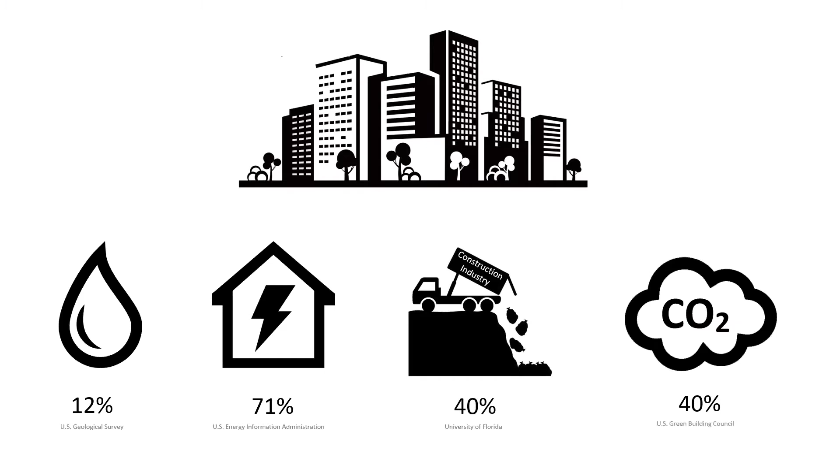Buildings have a tremendous impact in the United States. About 12% of our water and 71% of our electricity are consumed directly in buildings. If you take a look at our landfills, about 40% of what's in the landfill comes from the construction industry, and about 40% of the entire country's CO2 is attributable to buildings.

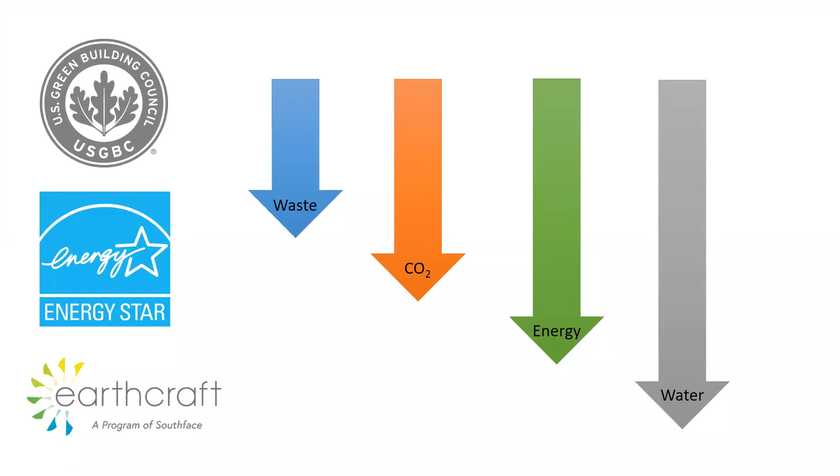We owe a huge debt of gratitude to the various green building standards that exist today. They have moved the market, building code, and conversation towards better buildings for the environment and occupants. But in a world facing environmental challenges and all of the equity impacts that come with them, is it enough to do better? For the Living Building Challenge, the answer is no. In a resource-constrained world, incremental change is not a viable option.

Buildings have to be regenerative like flowers and give back more than they take. They have to be self-sufficient to the greatest extent possible, and they have to create a positive impact for people and planet. The Living Building Challenge is framed around 7 performance areas called petals. They are place, water, energy, health and happiness, materials, equity, and beauty. Projects have to meet all of the requirements and prove performance over 12 months of occupancy. Folks, that's why it's called a challenge.

And this brings us to the Kendeda Building for Innovative Sustainable Design, which is at the Georgia Institute of Technology in Atlanta. It is a 37,000 square foot indoor, plus another 10,000 square foot outdoor, multidisciplinary, non-departmental education building. And friends, it's absolutely amazing.

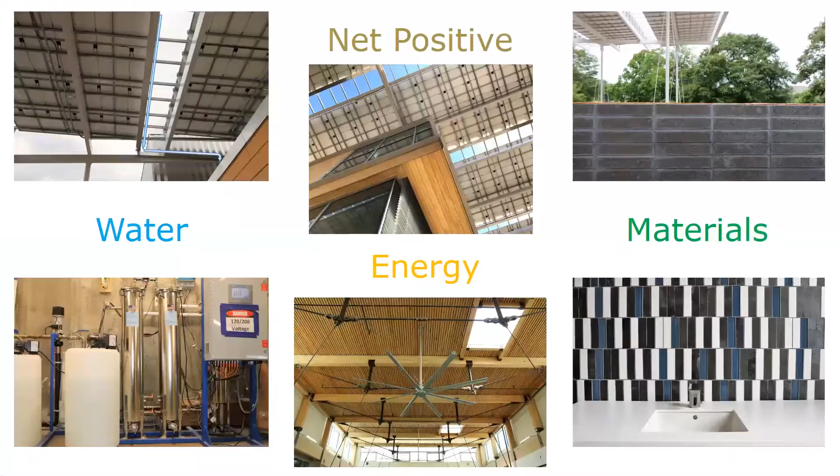It's designed to harvest more rainwater each year than it uses, and it manages wastewater on site. It produces more solar electricity each year than it consumes. During the construction process, it diverted more waste from landfills than it sent to landfills, and that's just the tip of this building's regenerative features. But we don't have enough time to cover everything.

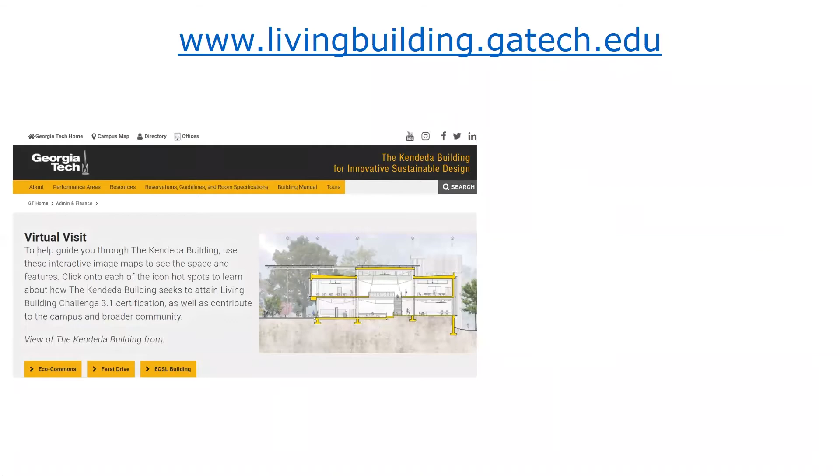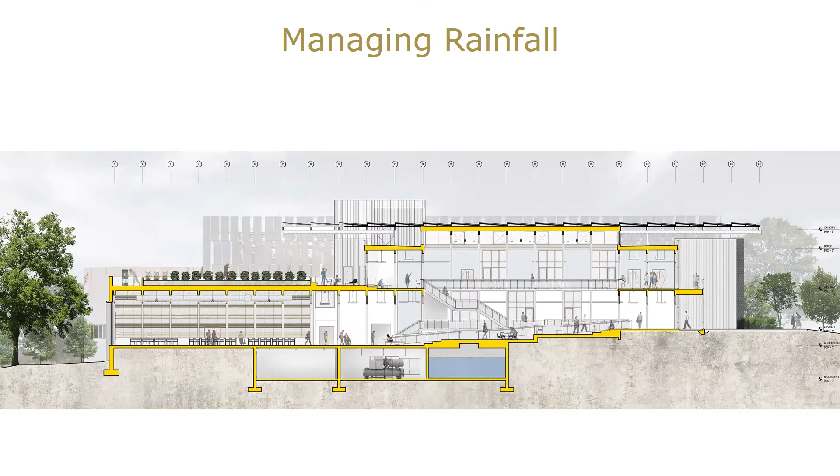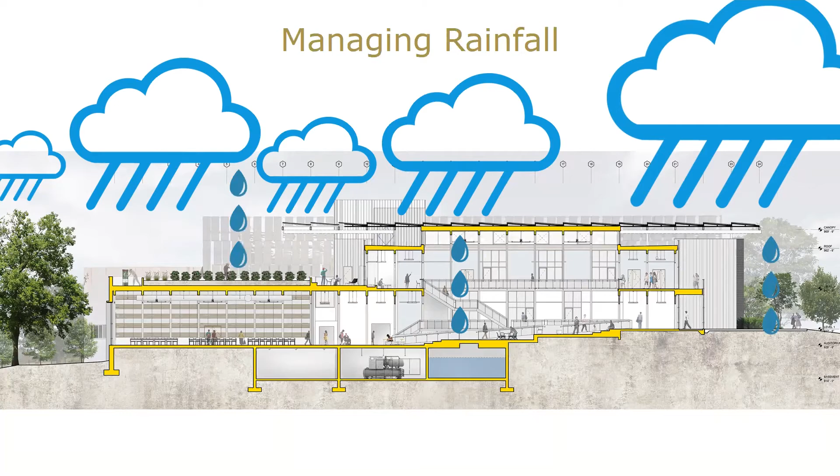And now I'll highlight features that we believe exemplify the benefits that regenerative buildings have for the communities in which they're located. Let's begin with water, because water is life. The Kendeda building manages rainfall much as a forest would. During a normal rain event, 90% of the water remains on site. This reduces stormwater runoff that floods streets and negatively impacts downstream communities. That's an equity win. And it also reduces burden to infrastructure. That can save taxpayers money.

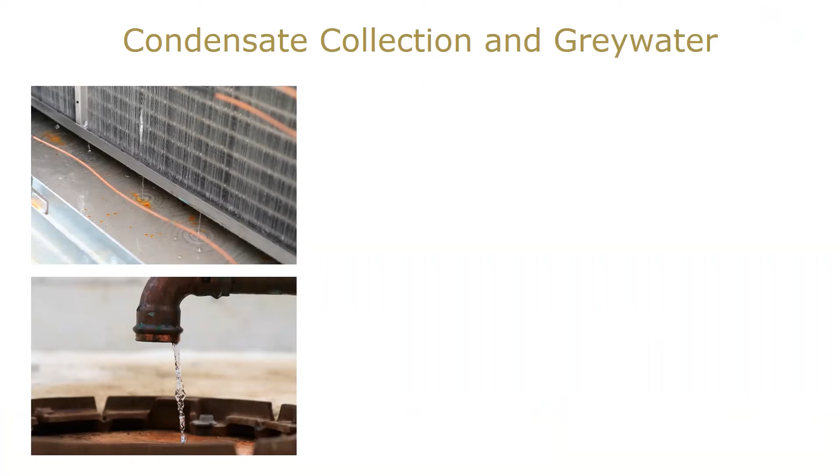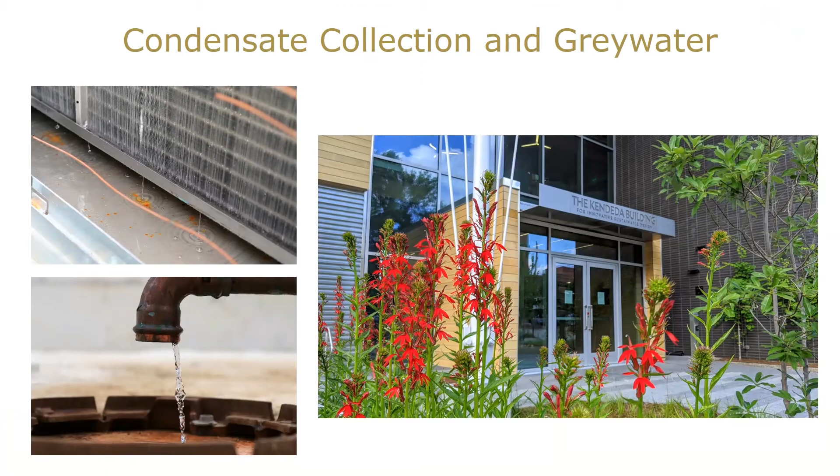The building is creative in reusing all types of water. HVAC condensate is used for on-site irrigation. Greywater collected from showers, sinks, and water fountains is pumped to a constructed wetland where plants and soil filter the greywater. In a conventional building, these types of water would go down the drain, and that's such a waste.

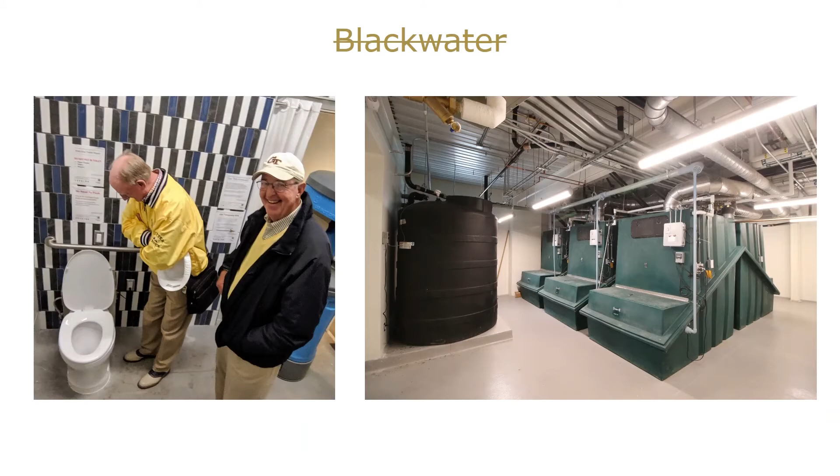Now let's talk about the icky stuff. Foam flush toilets use about a tablespoon of water to deposit your waste into bins in the basement. Basically, we brought an outhouse indoors. Natural systems break down your waste into compost. Our toilets do not connect to the sewer. Think about that.

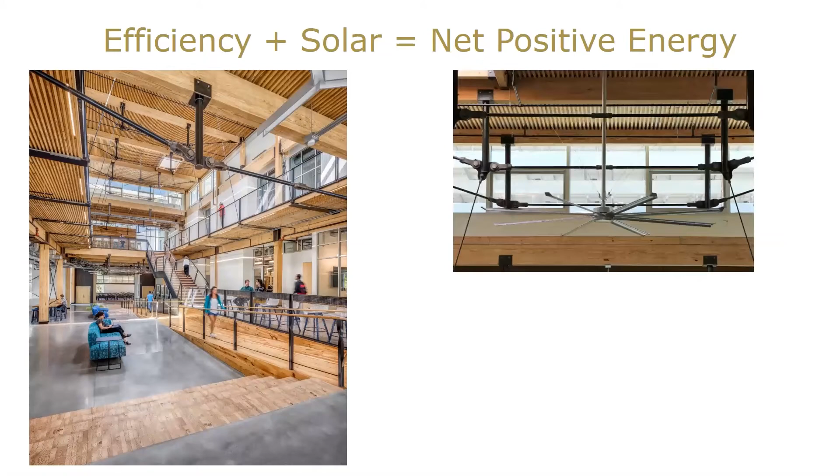Moving on to energy. Here's how the building gets to net positive. It's built well. Air doesn't come in or leave unless we want it to. And there's lots of natural lighting. We have efficient systems like fans. And this gets the building to 72% more efficient than a conventional building. And then we add solar to get us to net positive.

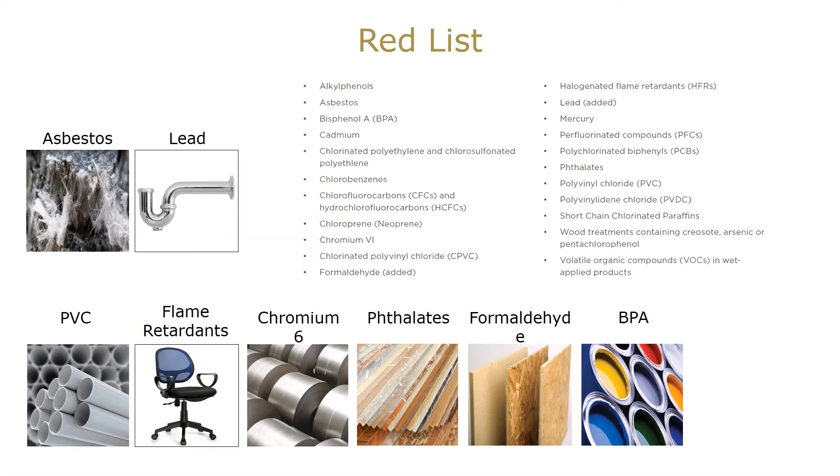Materials is the most complicated petal. A main reason is because we're surrounded by harmful chemicals that the Living Building Challenge aims to eliminate. We vetted materials in the Kendeda building to the greatest extent possible against a red list of 22 worst in class chemicals. But shouldn't there be an easier way to rid our buildings of toxins?

Packaged foods have a nutrition label so you know what you're consuming. Shouldn't you have something similar for building materials, considering we spend 90% of our time or more indoors? Thankfully, there are certifications that vet materials for toxicity. And the Declare label is like a nutrition label that lets you know whether your building products contain harmful materials.

The materials petal also requires the incorporation of salvaged material. We took materials from renovations, demolitions, and storm events. We milled them into stairs, tiles, and furniture for the building. This diverted perfectly reusable material from the landfills and provided local employment for workers who salvage these items.

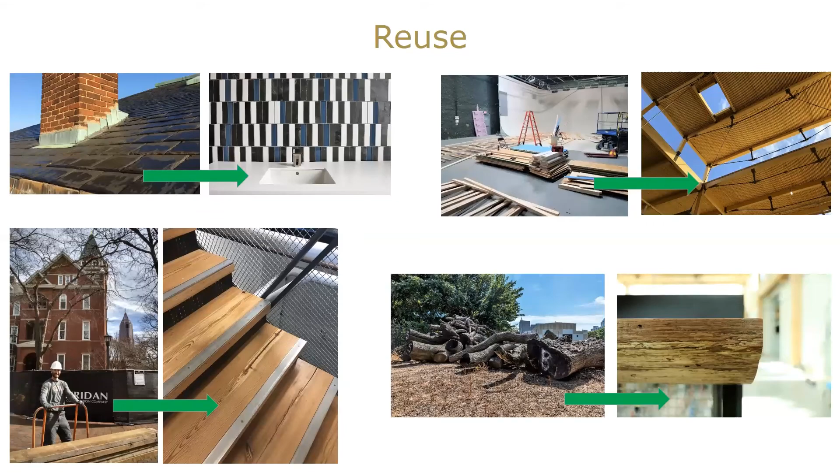If we scale regenerative buildings, we could spark an industry that doesn't exist, what we call a salvage economy. Just imagine going to your local home improvement store and checking out their selection of repurposed materials that were diverted from the local landfill. If we create demand, we can turn this into reality.

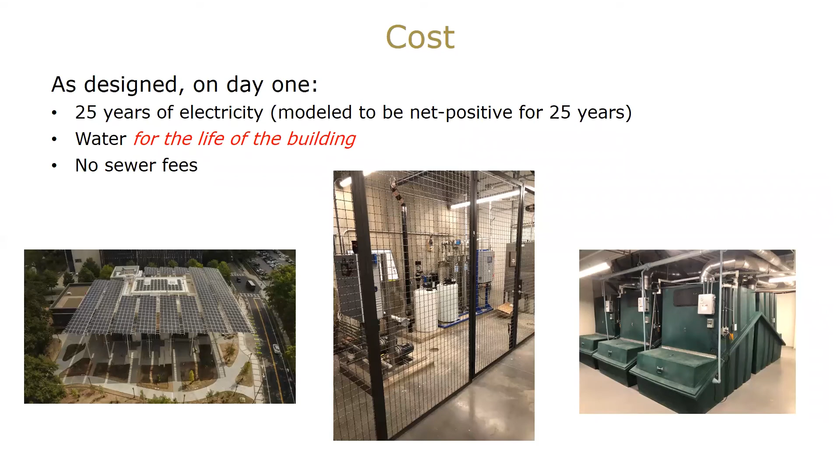Now you're probably thinking, but how much does all of this stuff cost compared to a conventional building? Well, keep in mind that this building's upfront cost includes 25 years of net positive energy, water for the life of the building, and no sewer fees. So a proper comparison has to consider lifetime operating costs, not just upfront costs.

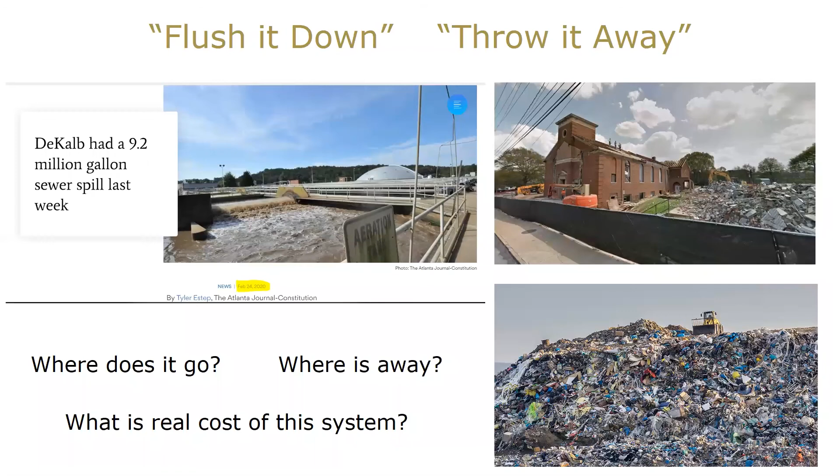But here's another way I conceptualize cost. We say flush it down, throw it away, without thinking about where our waste goes. Therefore, shouldn't we also consider the societal costs of where our waste goes? Because it doesn't go to Mars. It stays on this planet, and we're all paying a price. Our future generations to come are still going to be paying the price.

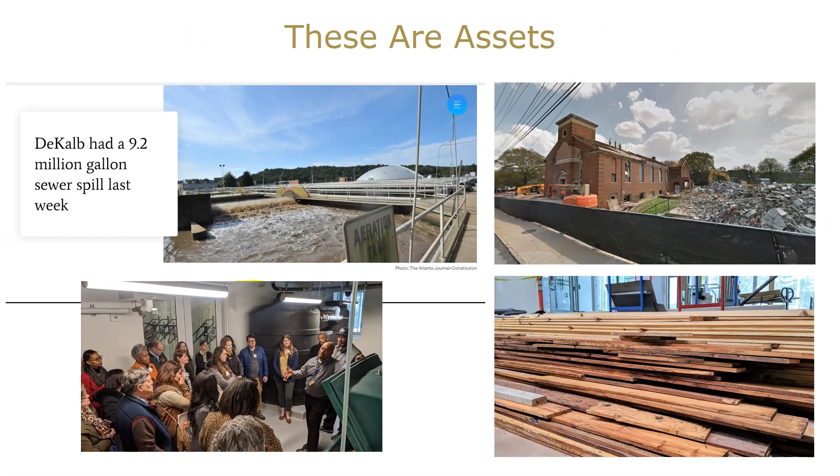The Kendeda building shows that our bio-waste can be diverted from sewers and turned into compost. Instead of ending up in a landfill, construction waste can become the spark for a local industry that provides locally sourced building materials. You know, there's a saying, you can't unlearn what you learn from a living building project.

You now have the knowledge to demand more of your policymakers, the contractors that construct your buildings, the companies that make your products. Demand a society that is less toxic for you and nature. We all deserve buildings that are built for people and planet.